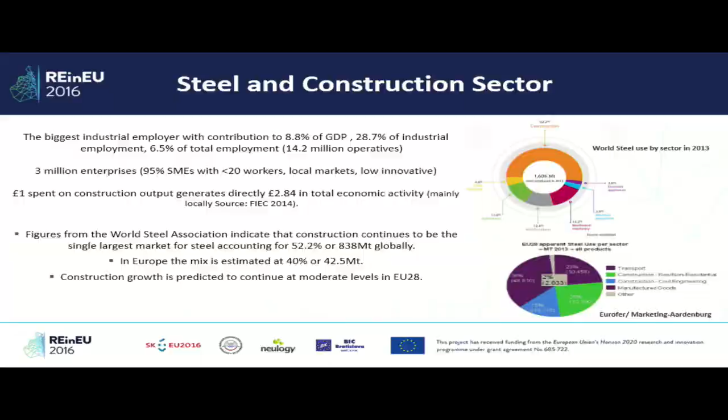The construction market itself is a very important sector for Europe in terms of its contribution to GDP, but also employment—it's a big employer, the sector. However, it is represented by a large number of SMEs, and that has a knock-on effect on innovation and how the sector can move forward, because most SMEs have fewer than 20 employees, with little or no R&D, but also challenges in implementing innovation. We've seen in the earlier plenary session how the Commission is trying to enable that.

Having looked at steel and the construction sector, I would like to move on to the trends. The sector is basically faced with challenges associated with rising population, expansion of urban and mega cities, global warming, the effective use of resources, an aging population, and the role we can play in contributing to societal issues, and how we can master CO2. The main driver is the trend towards megacities and everything that comes with it in terms of resources, transport, and how we can manage and feed all those people living in those cities.

You can see from the picture, we've got the shift towards digitalization in the construction sector. It's a new way of working in construction. Having said new, it's really a collaborative way of working that has always been there, but previously everyone worked in their own patch with their own IT and software. Now there's a trend where we work together through BIM.

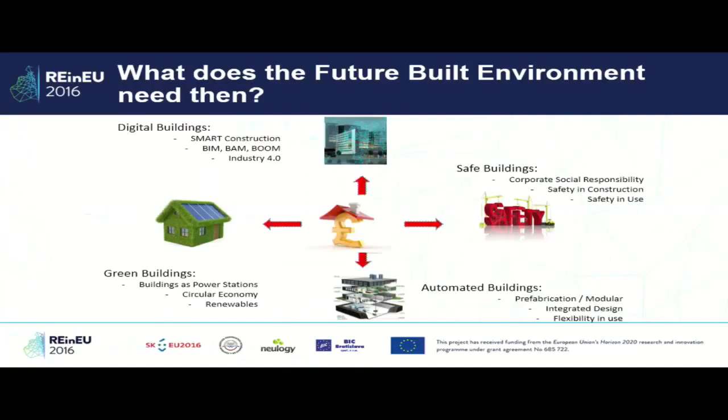And of course, that's the theme of this conference: how we can make buildings power stations, self-sufficient in terms of energy, but also contributing to the grid and the neighborhood. In that case, we'll be transforming the building from just a roof over our heads into an asset.

Also, we need to open up our eyes a little and look at composite construction, composite materials. What other materials are out there that we can work together with?

What we call, and there was an interesting question earlier, the Valley of Death. What we need to do is bridge that, make sure we have policies and legislation in place to help us address that valley and bridge it.

Now with the digital natives, startups and so on, there are so many good ideas at the lower end of the TRL. But between that and being a commercial product, there's a huge gap. We need support on how we can bridge that, to take those ideas and startups and make them a success.

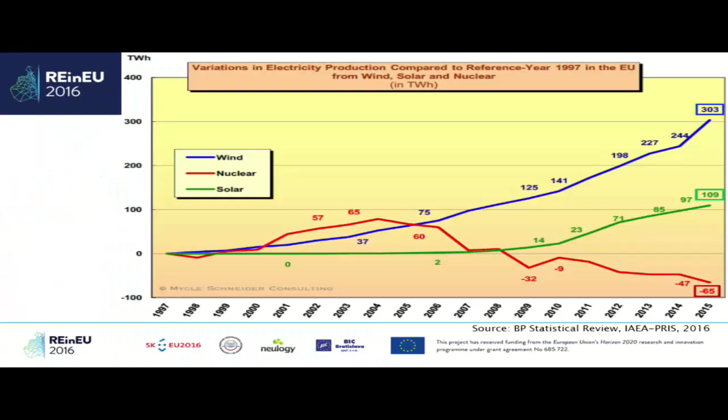This is statistics for the last practically 20-something years, since the late 1990s. The Kyoto Protocol was established in 1997. We can see that some sources have been growing steadily, especially wind energy has been growing very steadily the whole time. Later, after 2007-2008, photovoltaic systems also started to climb up the ladder.

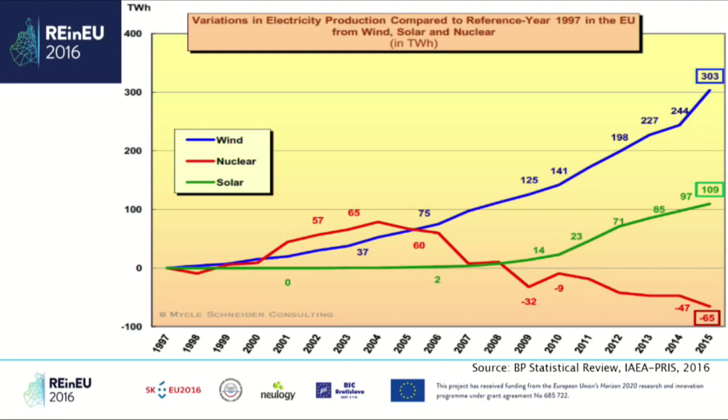But another strong source, which is discussed a lot in Europe, is nuclear energy, and we can see that even when there has been some growth, finally more reactors have been shut down than how many have been turned on. It means that the nuclear industry in Europe is in decline, even if we are talking about nuclear renaissance or other new words. Is this good? Is this bad? It's a matter of discussion, but the situation is showing that nuclear energy is declining.

Also, when we look at the last year more precisely, this is from the year 2015, we can see that the most growth of new sources is in the wind energy sector and photovoltaics. When we look at sources which have been shut down, most are in coal and also natural gas and fuel oil, also some nuclear. In these sectors, no or very few new sources have been put online.

What is interesting is coal, actually, because yes, 2 times more sources have been shut down than have been put on, but still, even in 2015, 4.7 gigawatts of new coal power plants were established in the European Union. That's not very good when we want to keep promises for climate change.

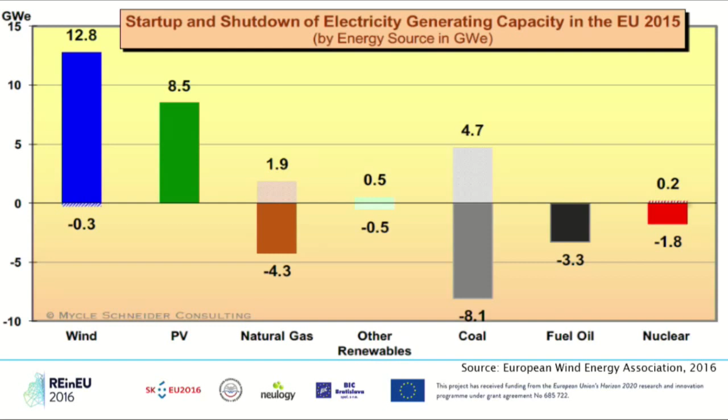And one other graph, which is showing the connection of new sources by countries, photovoltaic energy sources by countries. The last column is showing national renewable energy action plans, and even in 2014 we surpassed what we had promised to achieve.

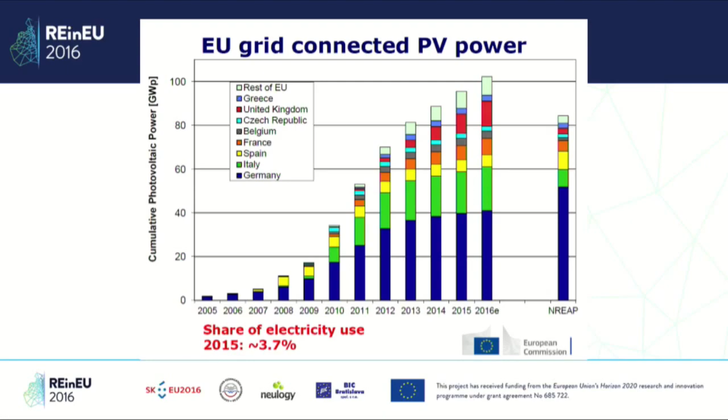We can see that in the years after 2005 up to 2010, the growth has been very small, but then it exploded, and now it's slowing down, the addition of new capacity in photovoltaics. But still, we can see some very rapidly growing countries. For example, in the last 3 years, the United Kingdom, which is an unlikely representative in this situation, but even the United Kingdom is building new photovoltaic systems in their soil. Of course, the most capacity is in Germany.

But well, there I have been showing a few graphs about the situation in the past and how it has been emerging. Now let's look at something different: the components of consumer price here in the Slovak Republic.

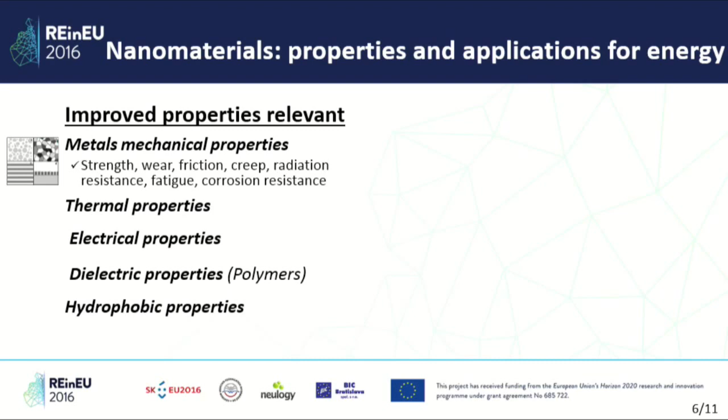But you can also manipulate the thermal properties, electrical properties, and hydrophobic properties, with very surprising applications for enhancing heat transfer. I will speak of them.

Now, we found that most of the activity sectors of our job at EDF for energy were concerned by nanomaterials. We find applications in electricity production, efficient materials for power plants, enhanced heat transfer, photovoltaics, fuel cells, energy conversion. We are interested in heat pumps without mechanical parts, using thermoelectric effects, and system integration.

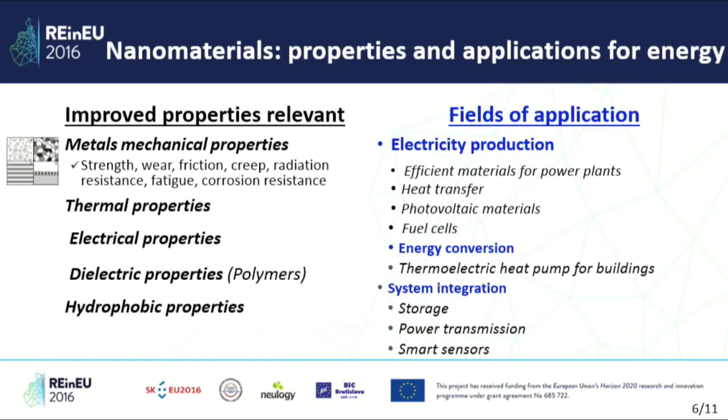We need storage. Renewable energy is intermittent, and this intermittency needs a strong development of storage, power transmission, and smart sensors. Now I will try to show you some examples, not many, but a few, where we find some interesting perspectives.

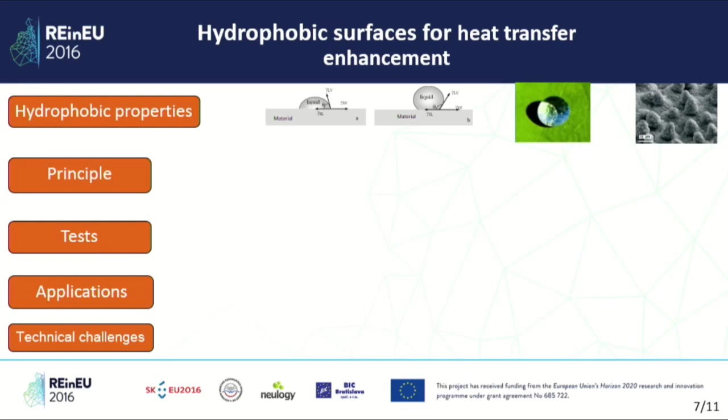Hydrophobic surfaces could be used for heat transfer enhancement. We know for a long time that when a drop is put on a surface, it can spread out - in that case it is hydrophilic. But if it doesn't spread, it is hydrophobic. The degree of hydrophobicity could be characterized by what we call the drop angle, that is the angle between the surface and the tangent to the drop.

For several years, scientific people have been interested in what we call the lotus effect. This high hydrophobic behavior could be obtained by nanostructuring the surface, with submicronic structuration of the topology. It allows the drops to not touch the surface but to roll on top of the pillars. One interesting application could be to enhance the steam condensation process.

Normally, this process occurs with what we call the steam film-wise regime. That means the film covers all the surface because it is hydrophilic, and it is not a very efficient process. If you can switch to drop-wise condensation, meaning you have a hydrophobic surface and so no film, then you considerably increase the heat transfer for the condensation step. But you need a hydrophobic surface for that.

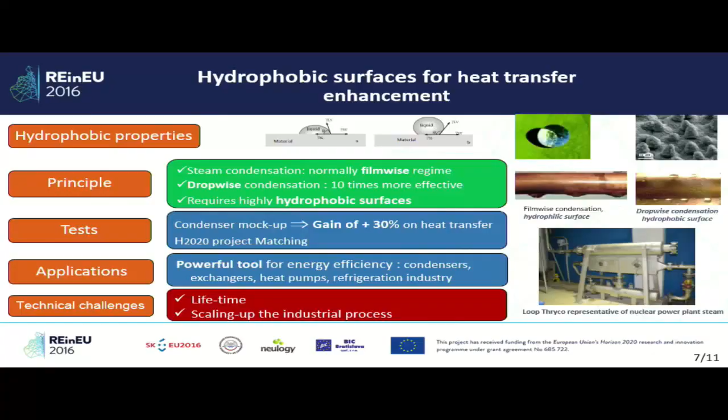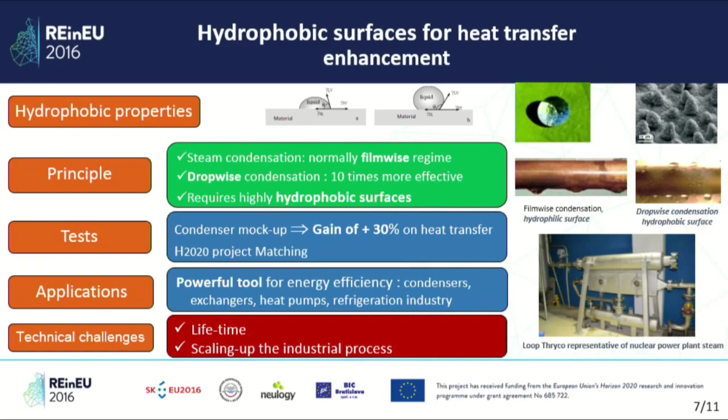But it's not so easy, because the main question is the lifetime. When you have a condenser, you don't want to change your tubes or the surface each year - you need really a very long durability. The second question is how to scale up the industrial process. We are working on that. We have good hopes, and this could be something shared at the European level with much benefit for each other.

Another question we studied is fuel cells. I remind you that fuel cells react hydrogen and oxygen on electrodes in order to produce heat, water, and power. We take interest here in high temperature fuel cells that work at about 600 to 1000 degrees. The need is to decrease the operating temperature in order to increase the lifetime and decrease the cost with less expensive materials. But to do that, you had to improve the conductive properties of the materials in order to operate at lower temperature. We tried to achieve that using nano-engineering of electrodes.

It's more or less a kind of impregnation of electrodes by nickelates nanoparticles. It's not so easy, there are very numerous parameters, but at the end we demonstrated that you can reduce, or by a factor of 10 increase, the conductivity of the cathode.

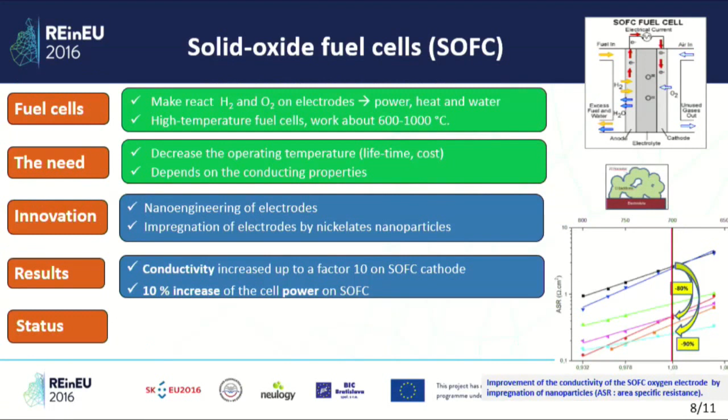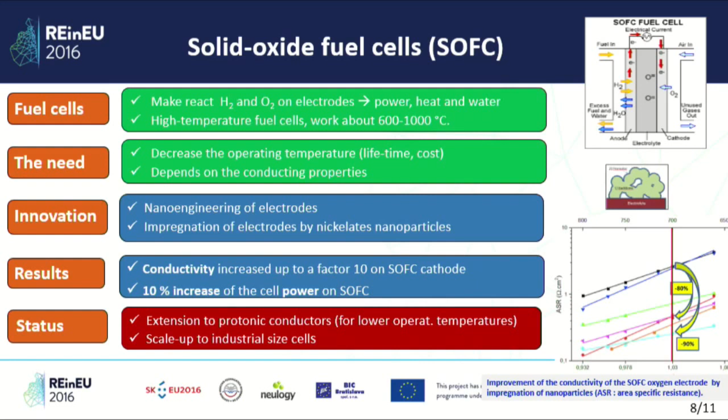In that case, it was on an SOFC, an anionic conduction cathode, and applied to the whole cell it gave a benefit of 10% increase in cell power. It's not negligible, it's quite important. Today we are trying to extend the process to protonic conductors that will allow operation at lower temperatures, and of course to scale it up to industrial size cells in economic conditions.

The last subject is micro-nano sensors. They open the door to very little power needed, and will allow long-lasting or complete energy autonomy. The interest is that probably the sensors will be low cost, with extended autonomy, and wireless. The main reason for our interest is that implementation would be much cheaper than sensors using hard wiring and numerous networks.

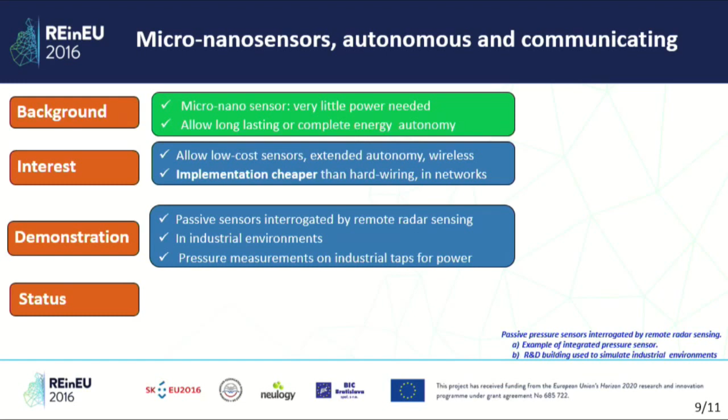So we studied this area and tried to demonstrate that passive sensors, interrogated by remote radar sensing, were operating in industrial environment. This is not easy because the electromagnetic environment in industrial systems could be very complex, and we were not sure it could work. The case studied here was pressure measurement on taps for power plants. These are not small taps like in your bathroom, but maybe 2 or 3 meters in height, so these are big taps.

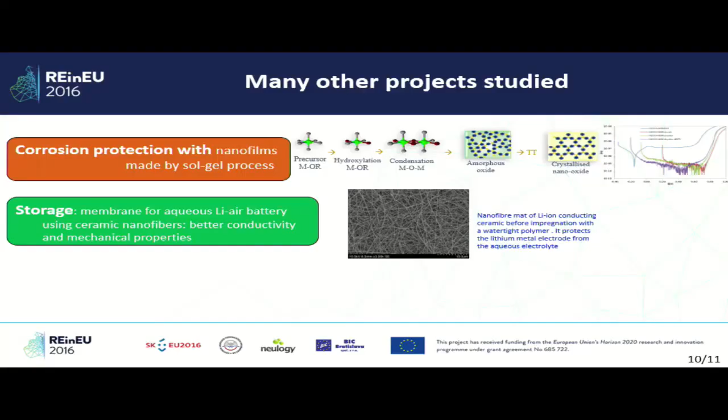We have studied many other subjects, but I have no time to describe them all. Just to mention corrosion protection using nanofilms made by a sol-gel process that could probably give a big benefit to protect some kind of stainless steel with stainless alloy. We developed, for electric storage, a membrane using ceramic nanofibers with much better conductivity and mechanical properties. It was for an aqueous lithium-air battery that we feel will be key for the future.

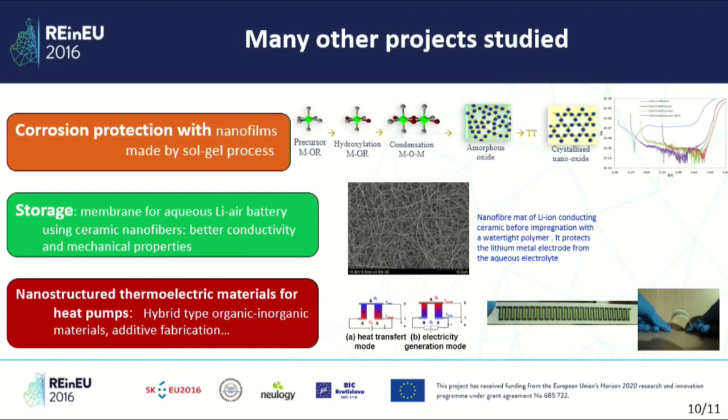And we are also working on thermoelectric material for heat pumps, on some materials which seem very promising—not yet giving good properties, but that could be a good answer for the future.

At last, my conclusion is that I have tried to show you that nanomaterials really have promise for the smart energy industry, and that EDF is involved and developing a lot of innovations. As a message, among the technologies we feel are important: storage for mobility on one side, but also storage for energy networks. The energy networks mean new renewable energy, but also system services.

The improvement of thermal transfer with super hydrophobicity will benefit a lot. The key question of autonomous sensors—I don't have time to speak of that—but innovative manufacturing, and particularly additive manufacturing, we feel could be of importance and worth developing. I thank you for your attention.

At last, I just want to mention that if people are interested to have much more information, I have written a chapter on this R&D, and it will very soon be published in a book named Nanotechnology for Energy Sustainability. I thank you for your attention.

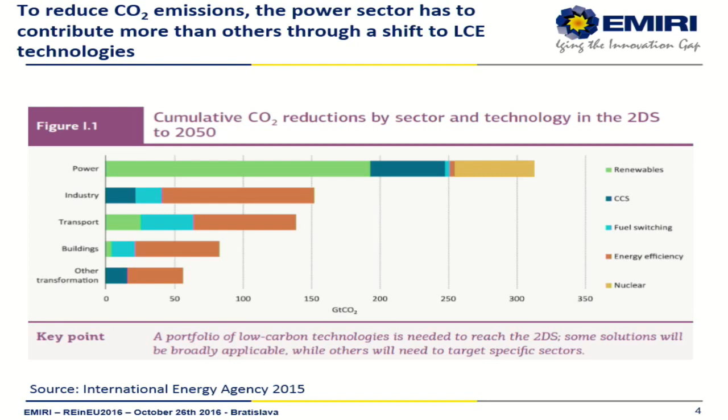So to reduce CO2 emissions, we know a few sectors have to contribute. We've been talking about transport, buildings, industry, but one of the sectors that has to contribute the most is, of course, the power sector. And it has to do that through the renewables. And of course, these renewable technologies need to show that they can constantly have the cost coming down.

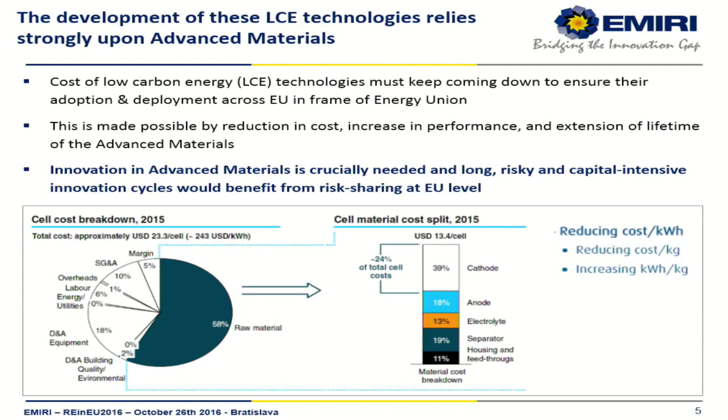If you look at the cost structure of these technologies - I'll take the example of a battery cell because I'm coming from Umicore and we are a big producer of materials for battery cells, so we know the market quite well - you can see that 60% of the cost of a battery cell is the material. So if you want to reduce the cost of the battery cell, you can work on the other little pieces of the pie chart, but if you work on the material cost, it's actually quite smart. So this is what you have to do: increase the performance, reduce the cost, increase the lifetime. These are really the levers you need to play with if you want to reduce the cost of these technologies.

Of course, we are a big sector - revenues are around 30 billion euros, around the GDP of Serbia. I think it's a bit more than a third of the GDP of Slovakia, so it's an important sector in Europe. But we see a few trends that need to be tackled.

Trend number 2: in the next 5 years, Europe risks being left behind in terms of investment in generating capacity. For wind and solar, China is actually in the lead, still competing with Europe, but 5 years from now China will be very well placed. Today, every hour, 2 wind turbines are installed in China.

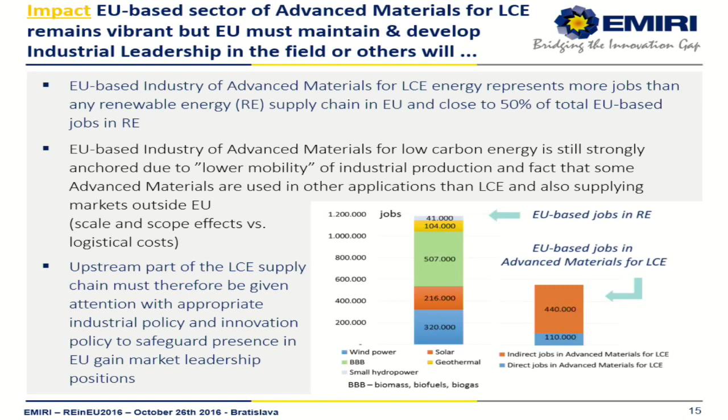One thing I want to stress is that if you look at the value chain, you need to look at its different parts. There's a downstream part, which we've been discussing, and an upstream part. The upstream part is actually advanced materials. In that field, there hasn't been a destruction of jobs—around 100,000 jobs have actually been created over the past years.

If you look at the histogram on the right, you can see that of the 1 million jobs we still have in renewable energy, around half of them are in advanced materials.

So why? Because we are very strong in the field, and also because you don't move an industry of producing materials like that. Also, when you produce materials, you don't produce them only for renewable energy, so sometimes if there's a change in one market and another change in another market, they kind of cancel out. So there's still a reason to be present in Europe. But of course, if the markets are growing very much outside of Europe, you can expect that the whole supply chain is moving.

We are in a European conference, so of course we have to look at the policies that we can use in order to mitigate these trends. There are a couple of levers that we can use, and I think actually the three most important levers are those which are in red.

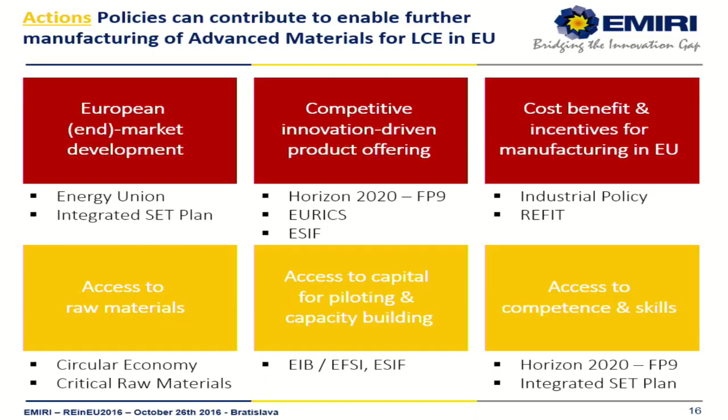The first one is European end market development. If our industry of materials doesn't have a market to provide something to, of course there's no reason to be in Europe, unless your cost position is such that you can still export. But of course, it's very difficult to export if it doesn't make sense economically.

The second pillar is a competitive, innovation-driven product offering. If you have a market but you are not in a position to offer something to the market, then of course your competitor that may be outside of Europe will provide something.

And the third point, a more general point, is the cost benefits and incentives of doing business in Europe. It could actually be possible to do business in Europe by not actually being established in Europe, but around Europe. You have the situation, for example, in the United States, where you can provide a lot of products to the United States by simply being established in Mexico. This is a trend that you see as well.

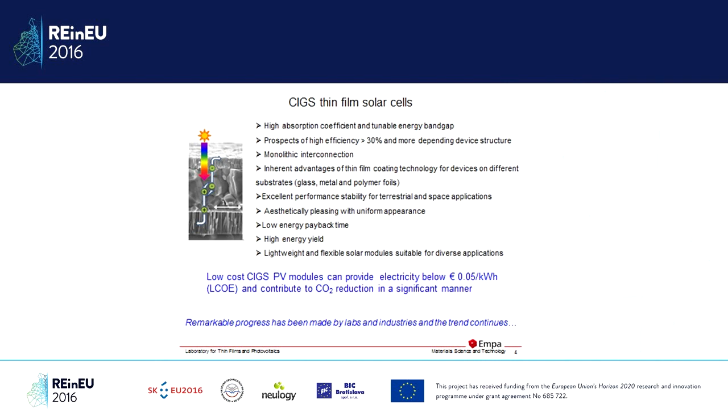More than 100 companies are working in this type of technology. Many of them are in China, and you have heard about the success stories or the challenges posed by those companies, how efficiently they have brought the cost of PV down, and how industries in Europe and some other countries have been affected because of the dominance of Chinese companies.

On the other hand, thin film technologies, predominantly based on cadmium telluride and CIGS, are very small, about 10% of the market share, but the production volume is continuously increasing, and they have certain distinct advantages. If we look at the advantage—

I'm not able to move it. Can you please move to the next slide?

So one advantage relates to the energy payback time, because sometimes money is not the only thing you have to consider—money can be calculated in different ways depending on how you have access to it. But very important is the energy payback time.

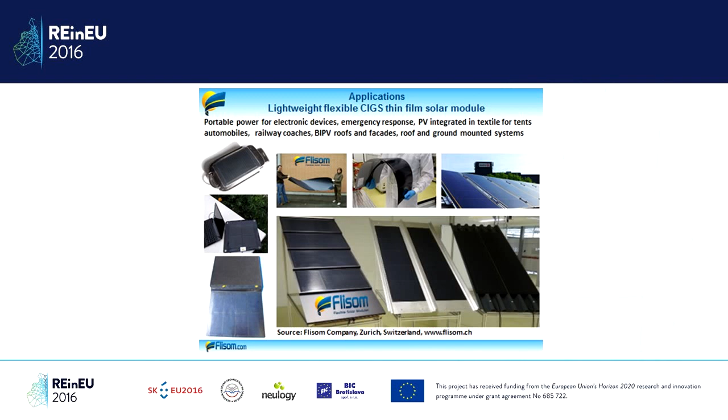When I say thin film photovoltaics, I'm talking about something different from silicon wafers, which are about 300 microns thick. Thin film photovoltaics are thin coatings applied on any surface - glass, plastic, or metal foil - about 4 to 5 layers of roughly half a micron to 1 micron each, so 3 to 5 microns total thickness. For context, human hair is about 50 microns thick, so we're talking about 1/10 of human hair thickness.

If you look at the energy payback time of thin film solar cells, which is CIGS and cadmium telluride, and compare to monocrystalline and multicrystalline silicon, despite lower efficiency, you have shorter energy payback time. This is a very good reason to consider that thin film solar cells would be very useful, especially CIGS, which stands for copper, indium, gallium selenide - it's important because it can give very high efficiencies.

Roughly about 22.6% cell efficiency has been achieved in the lab, higher than multicrystalline silicon wafer cell-based efficiency. These solar cells can be grown on metal, polymer, or glass substrates of large areas, few meters square. They look very black and beautiful, aesthetically very uniform, and have low energy payback time. Eventually they can provide low levelized cost of electricity, less than 5 euro cents, and help reduce the CO2 footprint significantly.

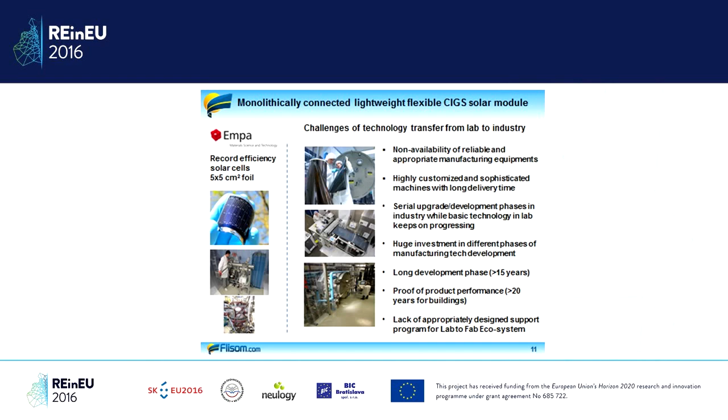When it comes to applications, this type of solar module is monolithically interconnected and grown on polymer film. The challenge was how to make such high efficiency small cells and then translate that on an industrial scale onto polymer films. You can sandwich them on any back surface and front surface, giving possibilities for portable electronics, portable power sources for emergency response, and you can laminate them on aluminum or steel for buildings and retrofits.

There are tremendous opportunities in buildings, transport, and electronics - only thing is you have to know how you want to use them. We have a European project called PVSITES, focused on investigating how one can use this type of flexible lightweight CIGS for building integrated photovoltaics.

As I indicated in the beginning, an efficiency of 20.4% was achieved in the lab, which was the world record from our lab and still holds. This efficiency is quite high, but on a small area solar cell of 0.5 centimeter square. Then we had to make a monolithically interconnected module, and with laser patterning we achieved about 17% mini modules. This showed that in principle the technology could be as efficient as multicrystalline silicon wafer technology for roll manufacturing. Then you go into the development phase, which takes many years.

Equipment delivery time is typically 1 year - when you buy equipment and pay the vendor, you get it after a year. These were some of the challenges, how you go in a phased manner. It's a huge risk going from a very small, teeny tiny solar cell to the dimensions I showed you. You need very good investors who believe in the technology and are open for innovation. We were really very fortunate to have that type of investors.